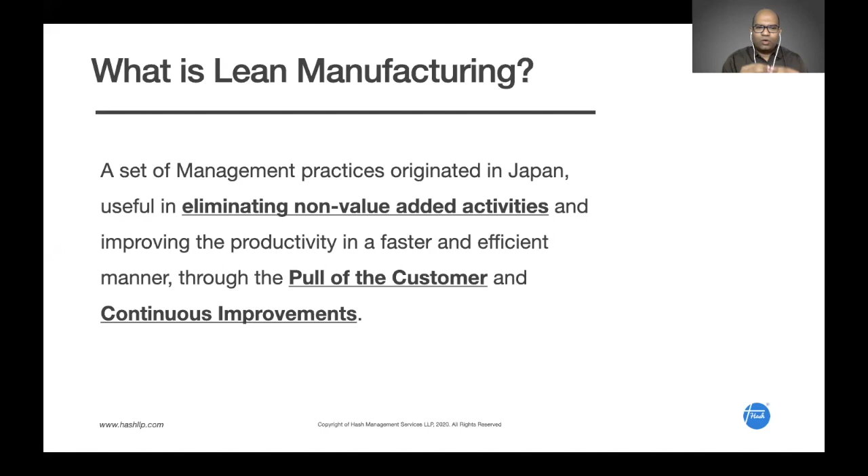The first one is eliminating non-value adding activities. Second one is the pull of the customer, and third one is the continuous improvements. Right. So these 3 are the major foundation of lean, and we are going to look at these non-value added activities in detail today. So let us learn about that. What is this lean manufacturing?

Lean manufacturing is a concept started by Toyota. They started in the early 60s, and they perfected it over the next 20 years. And the Western world tried to adopt the same, and they renamed it as lean manufacturing. So essentially, it's a Toyota production system. People can use Toyota production system and lean in a similar way.

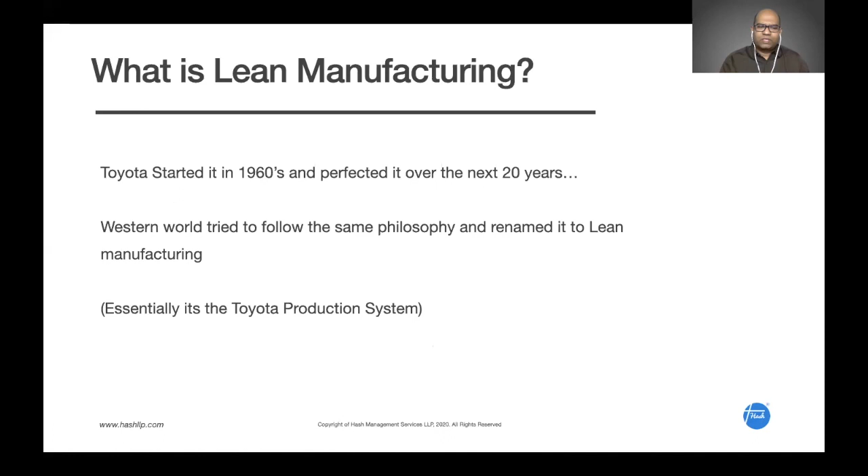Let us look at the history of lean manufacturing. What happened in the 50s and 60s is, after World War II, Japan's economy was in a very bad shape, and the country as a whole wanted to improve.

So the government gave a lot of incentives and took a lot of steps to build the economy, and a lot of companies started manufacturing automobiles, because automobile manufacturing is one of the key industries which will impact a lot of other industries, the ancillary industries, directly and indirectly, right? So it has a big impact on the overall economy.

So a lot of companies started entering automobile manufacturing, like Toyota, Honda, Suzuki, Yamaha, everything. Toyota, if you look at it, earlier they were doing textile machinery business. Even now, a lot of textile machinery will be from Toyota. So when Toyota as a company entered automobile manufacturing, they didn't have the technology. So they wanted to have the technology.

So Toyota's chairman visited America to understand automobile manufacturing, and essentially he visited the big three companies: General Motors, Ford, and Chrysler. And what he observed was American cars at that time, I'm talking about the 50s, were very big cars with large engines. People called them gas guzzlers, and those kind of cars will not suit Japan, because Japan as a country was very poor and they were starting to rebuild the economy. So what he understood was these big cars will not be a great idea for Japan.

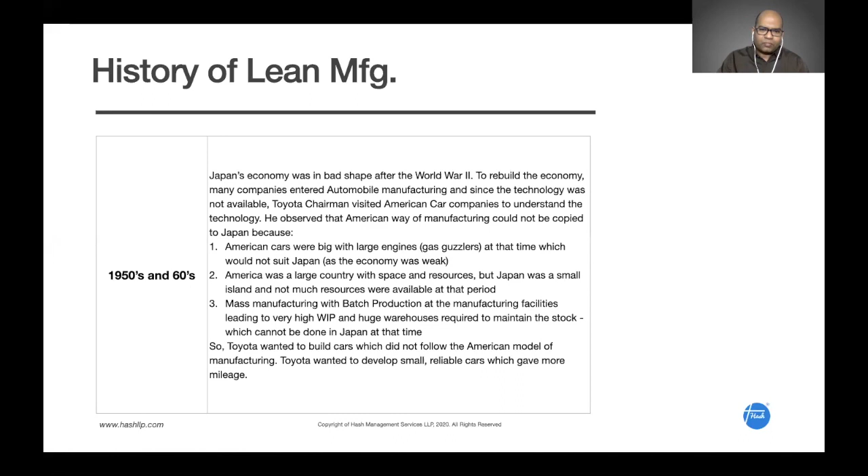So what Toyota started building in the 60s and 70s is small factories which will create multiple versions, multiple car models within the same plant. They tried to reduce the WIP through just in time production. They ran small batches of cars by reducing the changeover time, with faster development cycles, right? At that time, I'm talking about the 60s.

A car in America would have only a 10-year lifetime. Only after 10 years there would be an upgraded version. But Toyota wanted to break this, and they created new versions of the car once in 3 years or 4 years, and they wanted to do the right quality products at the first time. So essentially Toyota made reliable cars which are small cars and which gave a lot of mileage, and a lot of new versions started coming in, right?

So people started liking these Toyota cars, and in the 80s a lot of Americans started buying these cars. Toyota's cars and Japanese products in general became very popular, and the market share of the big three car companies started falling down. So what these car companies, GM, Ford, and Chrysler, did is they sponsored a lot of research, and through the universities, they sent a lot of researchers to Japan to understand how Toyota is manufacturing their cars.

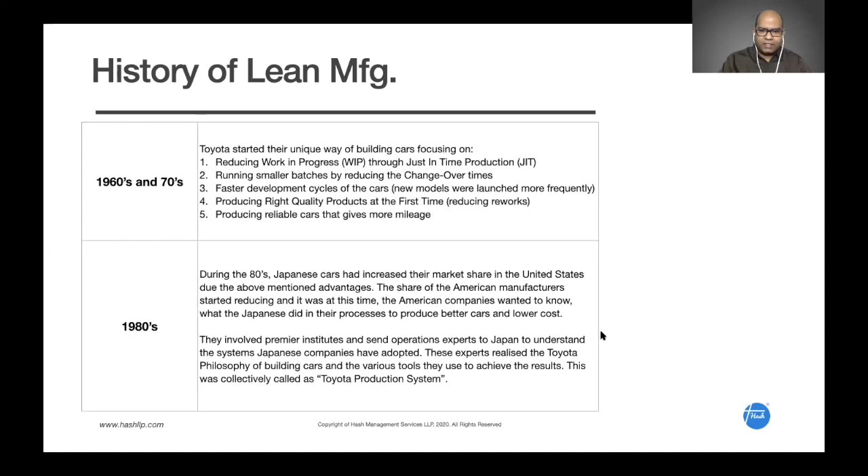Because they thought, okay, these are the people who came to us for learning automobile manufacturing, and now their cars are much better, giving more mileage, fewer breakdowns, right? So how are they doing these cars? So a lot of these researchers came to Japan in the 80s. They started learning these principles, and they went back to the US in the 90s and started taking this learning to the automotive industry.

And when they went to these American car companies, they cannot use the words Toyota production system, right, inside a General Motors plant or a Ford plant. So they wanted a different name, so they created a term called lean manufacturing. So in the 90s lean manufacturing became a big activity inside these US car companies. And after the 90s, in the early 2000s, it started spreading to a lot of other countries also.

In India, a lot of automotive companies like TVS Group, Bajaj, Hero Honda, have started following this lean manufacturing from the 2000s, the last 10 to 20 years. But what essentially we are following is Toyota's production system, renamed as lean manufacturing system. If you look at a lot of other big companies like Siemens, for example, they have their own manufacturing system, Siemens manufacturing system. If you look at Alstom, maybe they will have Alstom manufacturing system.

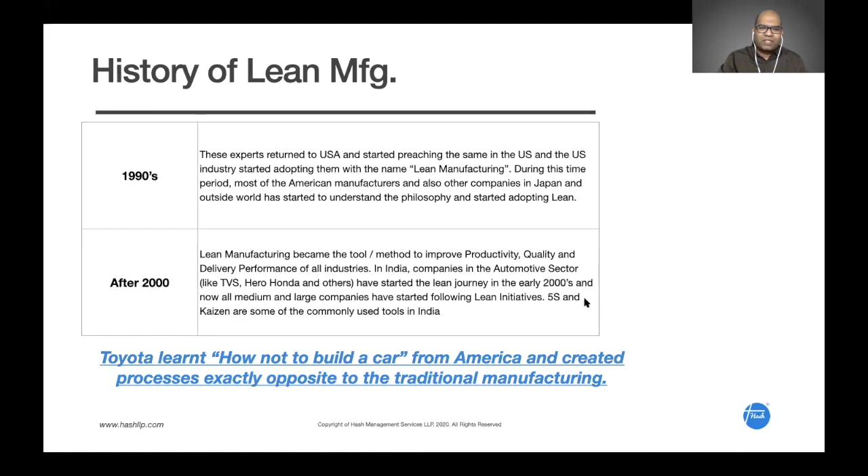But essentially, if you look at all those best practices from Toyota, the Toyota manufacturing system, that will be there. They just repackaged it, and every company started creating their own manufacturing system, which is essentially the Toyota manufacturing, right? So this is the brief history of lean manufacturing.

Is lean applicable to all the industries? Yes, very much. Lean philosophy can be applied to all the industries: automotive, machine shops, castings and forgings, plastic components, fabrication units, medical devices, leather footwear, food processing industries. A lot of companies can use this, and it doesn't matter whether your company is small, medium, or large. Lean can be applied in all sizes of companies.

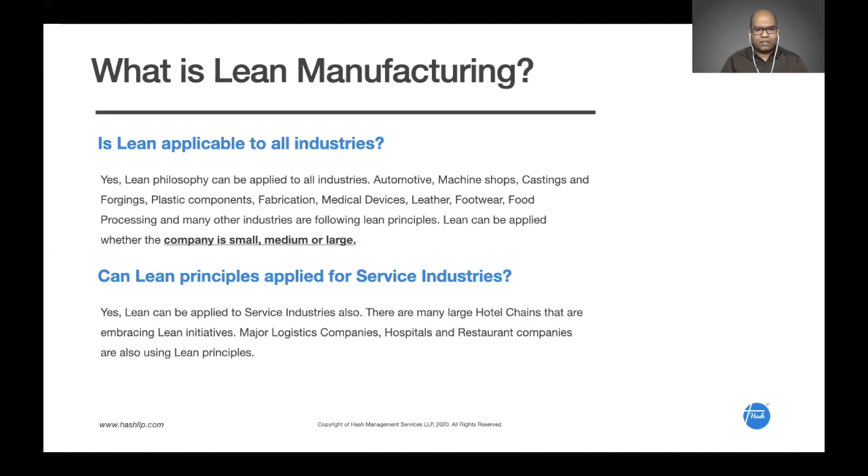Can lean principles be applied for service industries also? Yes, very much. A lot of hospitals and hotels in the Western world have started adopting lean principles. A lot of logistics companies, restaurant companies, people are starting to use lean in the service industries also. Right? So this is a quick history of lean manufacturing.

If you have understood the introduction, can you just type yes in the chat box, please? Is my communication okay? Are we going too fast, too slow? Is this okay or not okay? Can you just say yes? All right. Okay, can understand, right? Okay, good. I can see a lot of yeses here. Okay, thank you very much. Thank you.

All right, so we'll go to the next section. I hope everybody has their notepads and pen, right? We are going to have some exercises. So if you still don't have a notepad and pen, I request you to take your notepad and pen. Right? All right, so we are going to the next section.

So great. So we are going to learn about the work and waste. What's the difference between work and waste? Because this is the most important thing. Lean talks about the elimination of waste, and only if we know what is the waste, we can eliminate them or reduce them, right? So this is the most important realization that is required in Lean implementation. And in our consulting programs also, this is the first foundation we create. Once you identify the waste, it's very easy to eliminate them. So let us look at this work and waste.

Let us consider two persons. One person is an obese person, and another person is a lean and fit person. An obese person has a lot of fat in his body, right? A lean person doesn't have fat, so he has a lot of protein in his body. What are the common problems faced by an obese person? Lack of stamina, health issues, higher BP or cholesterol, high risk of heart problems, or difficulty in walking, running, climbing staircases. So a lot of these common issues are faced by this obese person.

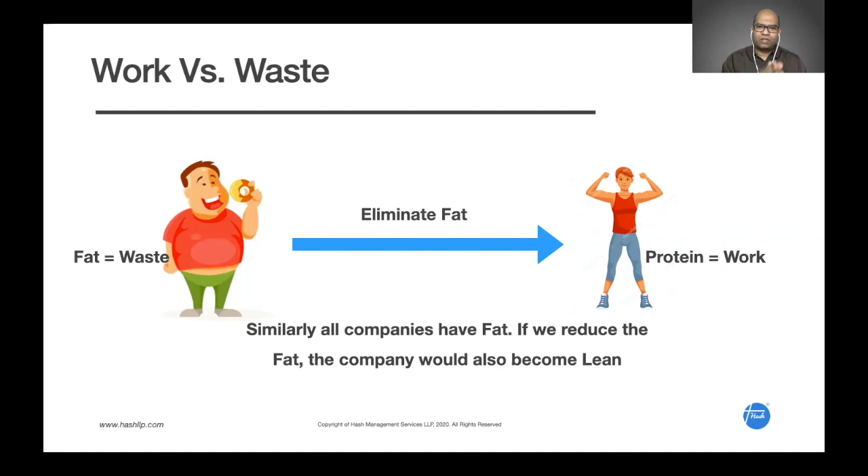We normally see a lot of these results, right? We will not be able to deliver on time. There are a lot of defects or rejections. People are always firefighting. So all these are results of the fats which are present in the company. We normally try to look at the results and try to eliminate the result, but the root cause is the fats which are present in the company. So we need to eliminate or reduce the fat so that the companies or the operations become lean. So that's what we need to understand.

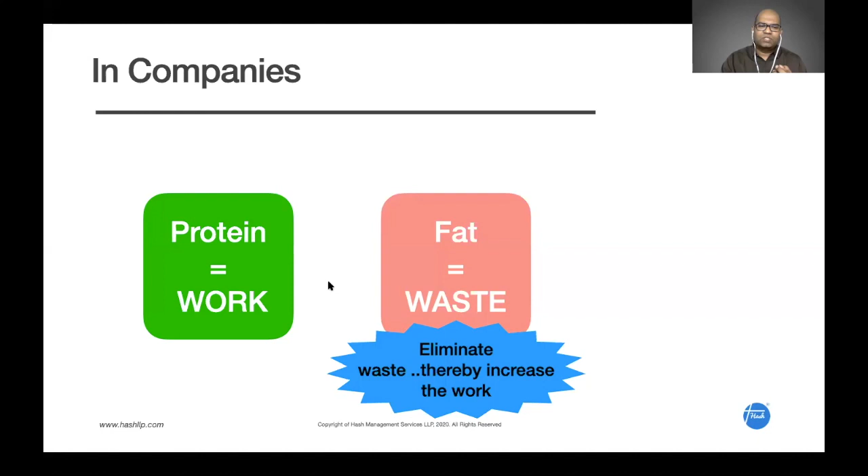So in a company's parlance, protein means work and fat means waste. If we reduce the waste, the company's rate of work will also improve. So this is what we need to learn now.

Let us look at this work. Work means whenever there is a physical or chemical change that happens in the product. That's what we call work. There is a physical or chemical transformation, a change which happens in the product.

The traditional definition of lean talks about what the customers are willing to pay for. Work is what the customers are willing to pay for. That's slightly difficult for a layman to understand. But when we say whether the physical or chemical change that happens in the product, that's called work, it's very easy for people to understand.

When there is a physical or chemical change, it means we are adding some value to the product, so it's called a value adding activity. Imagine sheet metal present in a raw material store, and you are doing a stamping operation. You will not sell the stamped piece at the same price as the raw material because you have added some value. There is some work which happened, a physical change, a deformation, and for this deformation you have added value. So this is called work.

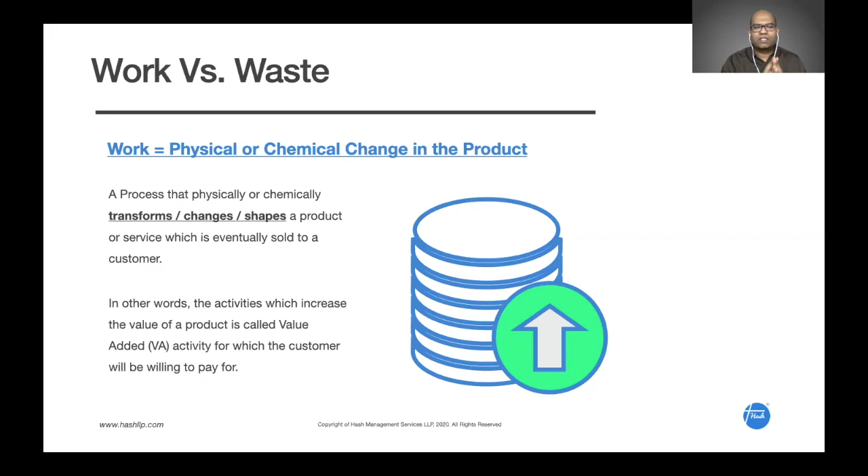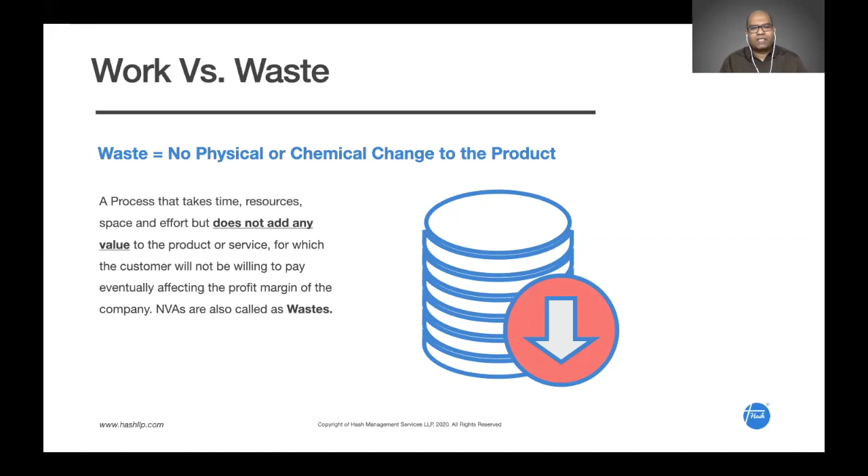So work means value adding activity, which means what is waste? Waste means when there is no physical or chemical change to the product. Any activity, any step, when there is no physical or chemical change, is called a waste, because we are not adding any value. The product is just idle, or there is no transformation happening, so there is no value addition. It's called a non-value adding activity.

If you carefully look at it, more than 95% of the time a product spends inside the factory will be waste. Only less than 5% would be the real value addition time. This is across most factories. Even Toyota, if they observe, their work versus waste will be like 30% work, they still have like 70% waste. That's the number they are now talking about.

So in a regular normal factory, when we look at it in an Indian context, more than 95% of the time would be a non-value adding activity.

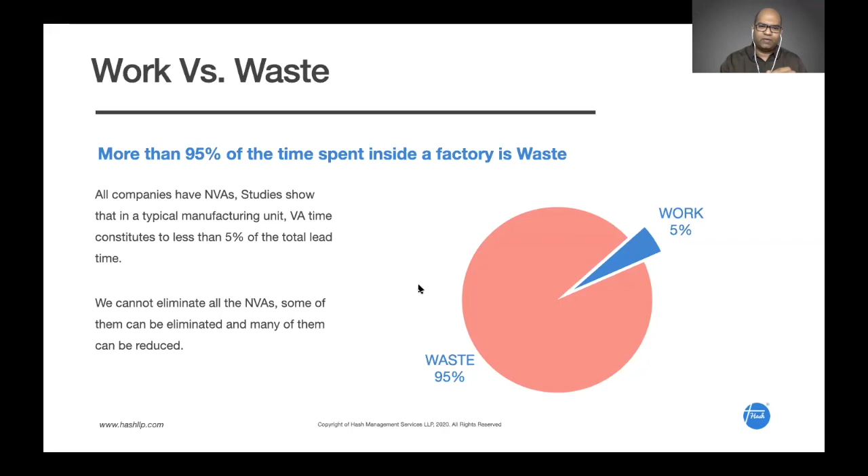Let me give a quick example. Consider a batch production, where the batch size is 1,000 pieces, and we are doing a stamping operation. In this stamping operation, the value added time will generally be 1 second, because that's the time for the punch to come and hit the component. We load the component, the punch and die hit it, and there will be a deformation. So this is normally like 1 second, and after that this first piece will wait for the remaining 999 pieces to get completed, so that this entire bin can go to the next operation.

So this is like 1 second value added time, and the remaining 999 seconds are non-value added for this particular product, because it is waiting for the next operation. There is no physical change which happens during this waiting time. The value added time, the change, happens only for 1 second. This is the way we look at it: work means when there is a physical or chemical change, waste means when there is no physical or chemical change.

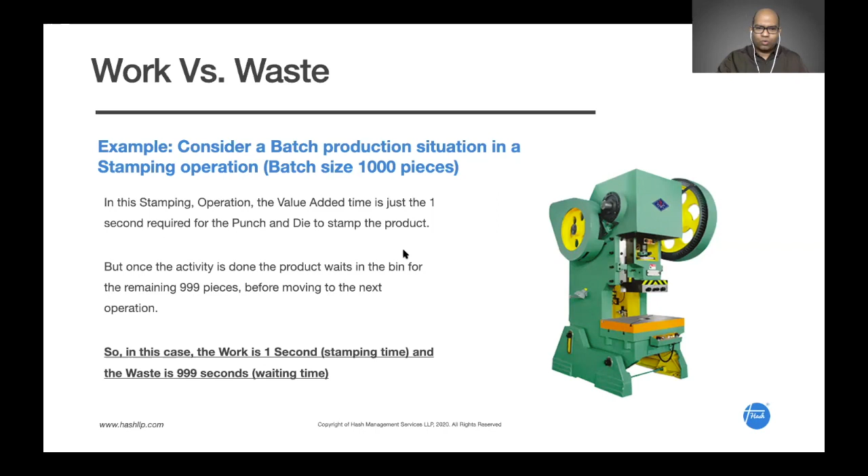We'll also look at a video to understand this more. I'm going to play a video now, where there is a small cutting operation. Take a look at the value adding time.

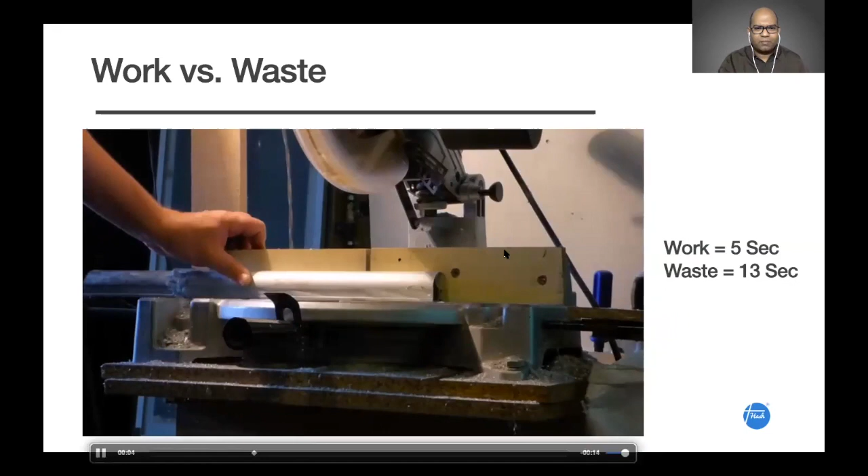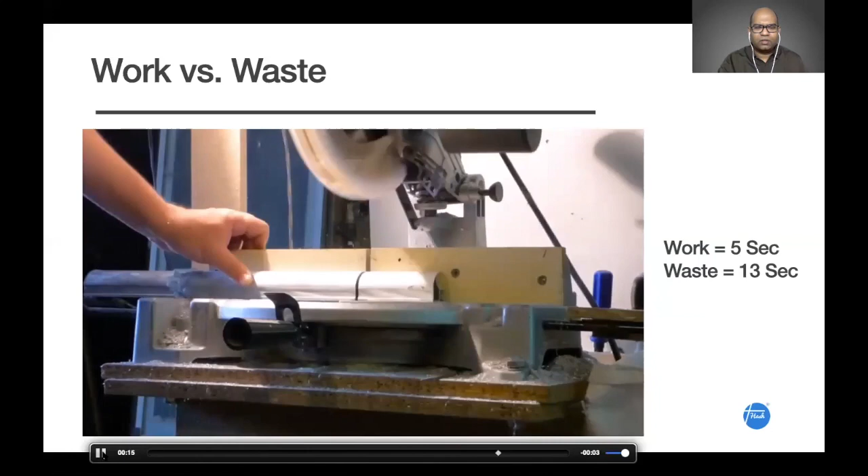So till this time, he has loaded the component and the wheel is traveling. Now it starts cutting, and the cutting activity is over, and the wheel went back to the home position. Now the operator has taken the component and left. There is still the scrap, or chips, which are still lying there - it's a waste, a small piece - and the machine is also idle.

If you look at this video, it is for 18 seconds. The work is for 5 seconds.

That is the time when the wheel touches the component and does the cutting, right? So that time is only for 5 seconds. What is the remaining 13 seconds? The time taken for the component to be loaded, the time taken for the movement of this wheel, all those things during that time. Is there any value addition that happens in the product? No, right? So these are all called waste.

It is not possible to eliminate all the waste, right? We cannot eliminate all the waste, but we can reduce a lot of waste. There are some waste that can be eliminated, some waste that can be reduced.

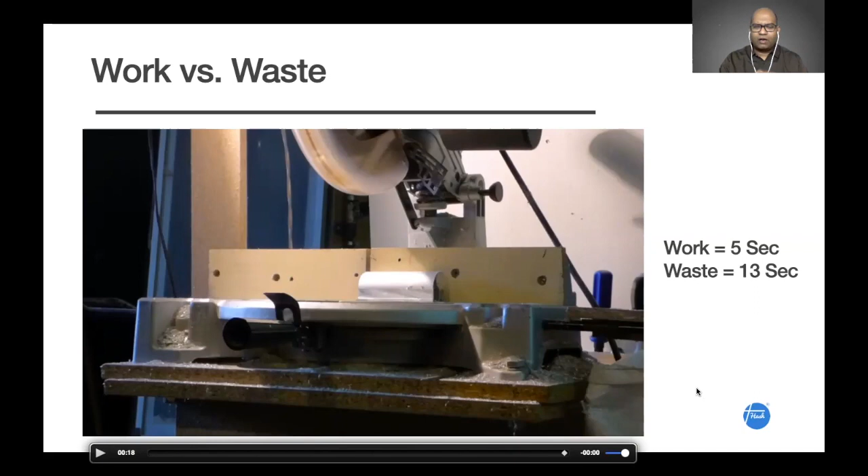We are going to look at this waste in detail in the next section, but I hope all of you are clear about this work and waste, right? So can you understand this work versus waste? Can you just type yes in the chat box if you are clear? Can you type yes in the chat box, please?

Yes, great, amazing. Okay, okay, all right. A lot of people are saying yes, great. So thank you, thank you. A lot of people are saying yes, thank you.

And now we are going to do a quick exercise, right? I want you to take your notepad and pen, list down what are the work in your company, what are the activities which constitute the work, what are the times when you have work in your company. If your operation has 5-6 operations like stamping, turning operation, heat treatment, powder coating, curing - I'm just giving some random operation names - just write down your activity and write down what is the cycle time for that.

It's 1 minute - the time actually taken for the value addition. What is the real value adding time? What is the time the component spends inside the machine or in that process? So what is the activity? What is the cycle time? If you have 10 operations, just quickly note down your 10 operations.

It doesn't matter if you don't know the exact cycle time, doesn't matter. Just note down approximately, like 1 minute or 30 seconds, 40 seconds, like that. Maybe I'm going to give you 1 minute, so you can write it down in your notepad. If you are done, you can say yes, completed, or DONE. I'm going to have a stopwatch timer.

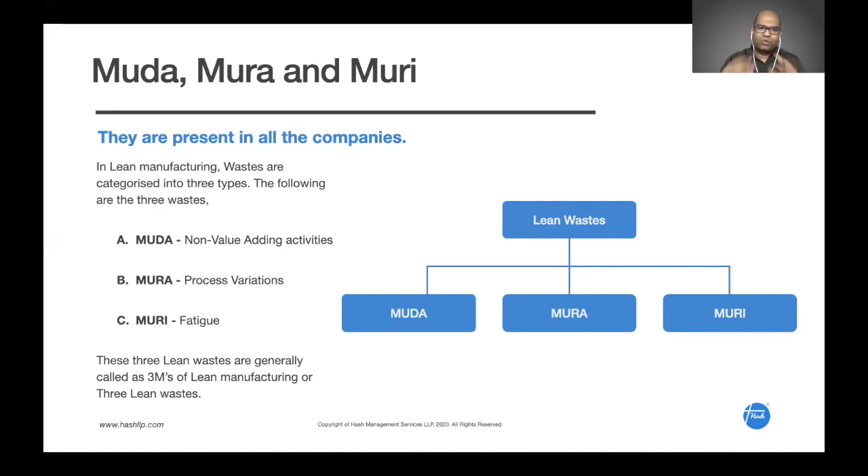Let us look at this waste in detail. There are three categories: muda, mura, and muri. These are all Japanese words. Let us look at these in detail. Muda means non-value adding activities, the activities which don't add any value. Mura means the process variations, and muri means the fatigue or strain caused to people and machines due to overburdening. So let us look at muda, mura, muri in detail.

First, let us look at muda. Muda means the non-value adding activities. In typical lean manufacturing parlance, there are 7 types of waste present in all companies. People have now started an 8th one also, but let us first focus on these 7 types of waste. We can easily remember them as TIMWOOD: transportation, inventory, motion, waiting, overproduction, overprocessing, and defects. These are the 7 types of waste present in all units. Let us look at each one of them.

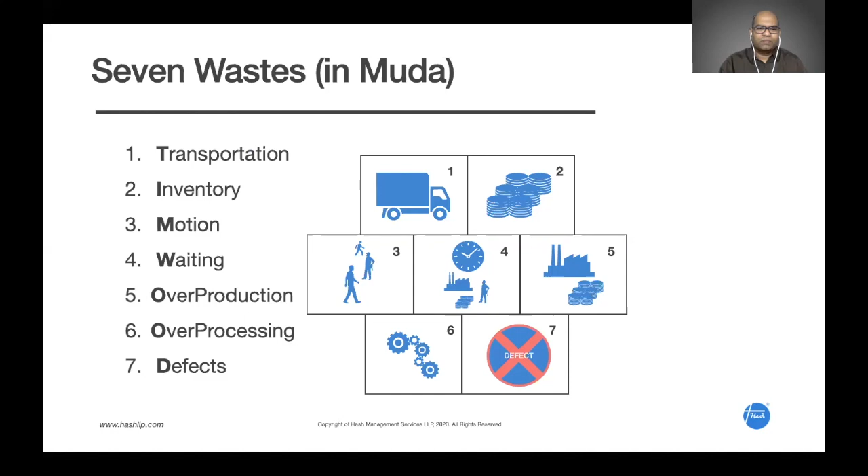Let us first look at the transportation waste. Transportation is moving the component or product from one location to another. Is there any value addition? Is there a physical or chemical change that happens during this transportation? No, right, only the location changes. So we call transportation as a waste. But can transportation be completely eliminated? No, because even if we create a better layout, like a continuous flow system where the machines are close to each other, transportation will still be there. We can reduce the transportation, but we cannot eliminate it.

So how can you identify this transportation waste? Whenever you see a lot of materials lying around in the factory, whenever you see batch production, there will be a lot of transportation. When you see a lot of conveyors, forklifts moving materials here and there, that's a lot of transportation.

So how can we reduce this transportation waste? By having a better layout, by removing this zigzag movement of materials, by having the machines and operations arranged in a product layout, so that the product flows from one machine to another.

If you visit a factory with a slightly older layout, like 10 or 20 years old, they will have something called a process layout, where similar types of machines are grouped in one location. For example, all the drilling machines will be in one location, all the CNC turning machines in one location, maybe the presses in a separate press shop. This means they can operate only in batch production; they don't have a choice because all the machines are grouped like that. So the entire bin has to be moved from one location to another. There is no product flow, there will only be batch production. These kinds of units will have a lot of transportation waste.

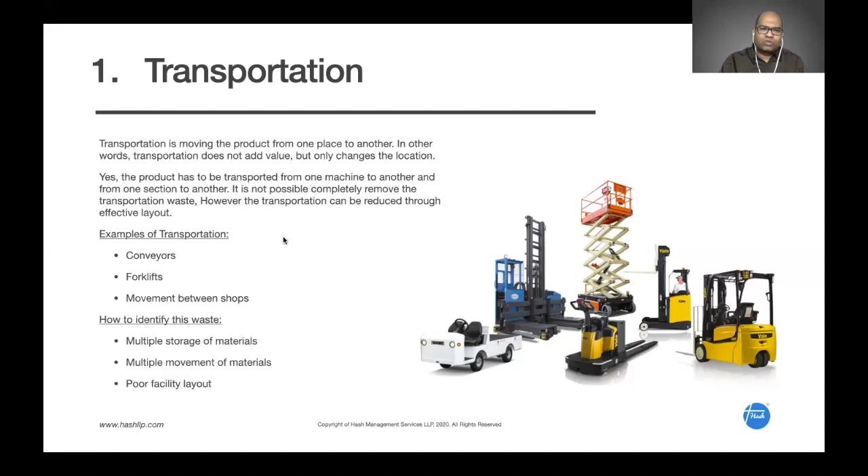Let us go to the next waste, that is inventory. Inventory is the stock present in the company. How can we call that a waste, since there is some value to it? During this inventory, is there any physical or chemical change that happens in the product? No, right. Inventory generally has three major classifications: the first is raw material, the second is work in progress, and the third is finished goods. During the raw material stage, the materials are stored in the raw material stores. Is there any change that happens in the product? No, right.

Similarly, during WIP, when the materials are present in between the machines, is there any change? No. Same thing with FG stock. Is there any change during the FG stock phase? No. So inventory, we consider inventory as a waste. Again, inventory cannot be completely eliminated.

There are companies which have started trying to eliminate inventory. Like if you look at automobile OEMs, I will give an example of Hyundai. Hyundai's plant is present in Chennai, outskirts of Chennai, and they have all their tier one vendors. The tier one vendors are the people who are directly supplying the components to the OEM, and all these tier one vendors, right, they will supply the materials only when it is required for the shift. Right? There is a concept called milk run where the vehicle will go to multiple units, get the materials, and then supply to the factory at the required time.

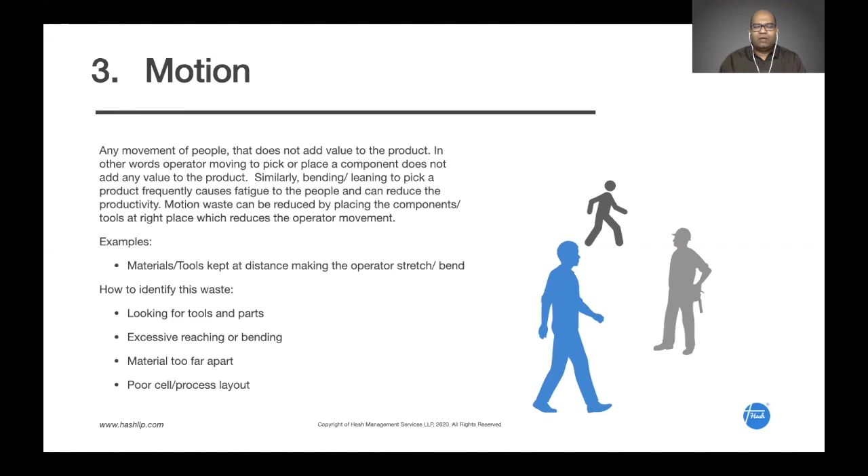And the fourth one is the waiting waste, the idle time in which no value addition takes place. Let us look at three major resources. The first one is the material, second one is the machine, and third one is the manpower. If one of these resources is waiting for any of the other two resources, it's called a waiting waste. So if the machine breaks down, the material will wait for the machine. Similarly, the manpower also will be waiting for the machine. Similarly, during a changeover time, the material will wait for the machine and manpower also will be waiting for the machine. And during absenteeism, you will have machine, you will have material, but manpower is not available. Sometimes machine will be available, manpower will be available, there is no raw material.

So when one resource waits for any of the other resources, it's called a waiting waste. I have seen an example of a person working on a CNC machine, right? This person's job is to load the component, close the door and switch on the process. So the machine starts working. It's a CNC machine, so there is no need for any manual input after that.

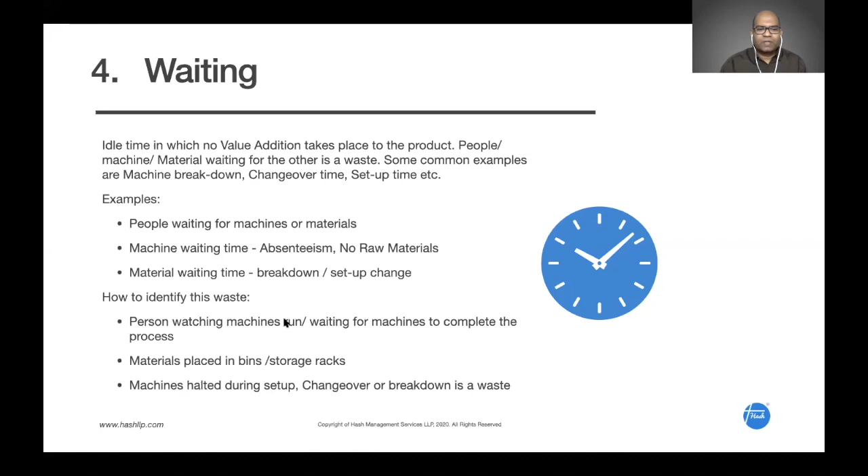But this person, after loading and switching on the machine, will be just watching the machine run, right? So this itself is a waste. This is a waste which I commonly observe in most of these machine shops. So when one resource is waiting for another resource, it's called a waiting waste. And now we are going to look at the fifth waste.

It's called overproduction. Overproduction means producing more than the customer's demand. This overproduction happens on two levels. The first level is on a company-wide level. We're working with a company which manufactures garments. If the customer order is for 1,000 pieces, they will plan for 1,020 pieces, right?

They add these 20 pieces as a cushion, because they may have some rejections in the processes. So they will add these 20 pieces more than the customer's order. So this is a clear overproduction which happens in most of the units. The second level of overproduction is producing more than the internal customer's demand. The internal customer here is the process which is next to my operation, right?

For example, if process A, that is my operation, has a cycle time of 1 minute per piece, and process B takes 2 minutes for one piece, after 1 hour I will produce 60 components, right? But process B will complete only 30 components because the cycle time there is 2 minutes. So these 30 components will be present in between process A and B. They will be the WIP, work in progress.

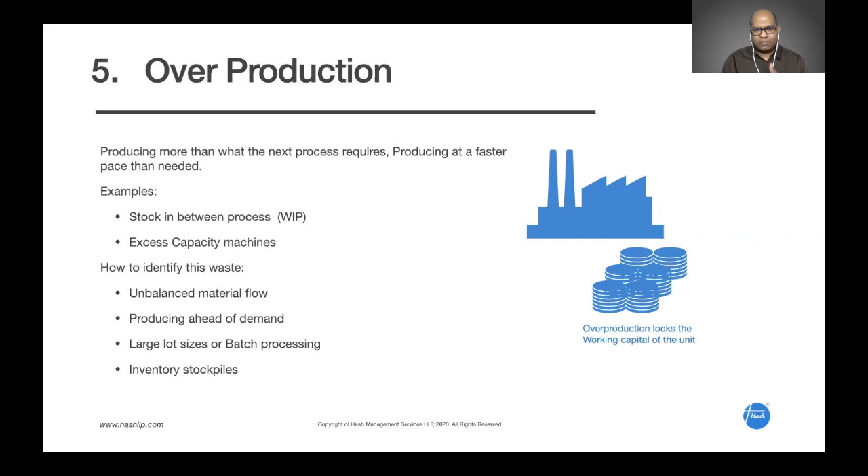And the next waste we are going to look at is over processing. Over processing means the efforts and activities that are added to compensate for some of the inefficiencies in our system. A traditional lean definition talks about processing more than the customer's demand. They gave an example of surface roughness. The customer asks for a particular surface roughness, but we produce a better surface finish. That is one level. But over processing, if you look at it, happens in many stages. I will give you an example.

We work with a large tire company. They have multiple sections. Once the product gets completed in the first section, they have to deliver it to the next section. And when they deliver, they will do an inspection, a counting or weighing activity, they create some documents, and they will pack it. They will wrap it with polythene, and then the material is given to the next section.

And when the next section takes the materials, they again do a counting or weighing activity, and then they do an inspection. They call it an incoming inspection, and then they have to remove the plastic wrapper, again create a document, and then they start producing. So this is what happens in multiple stages. Whenever there are multiple counting, multiple inspection, multiple packing and unpacking of material, we call it over processing.

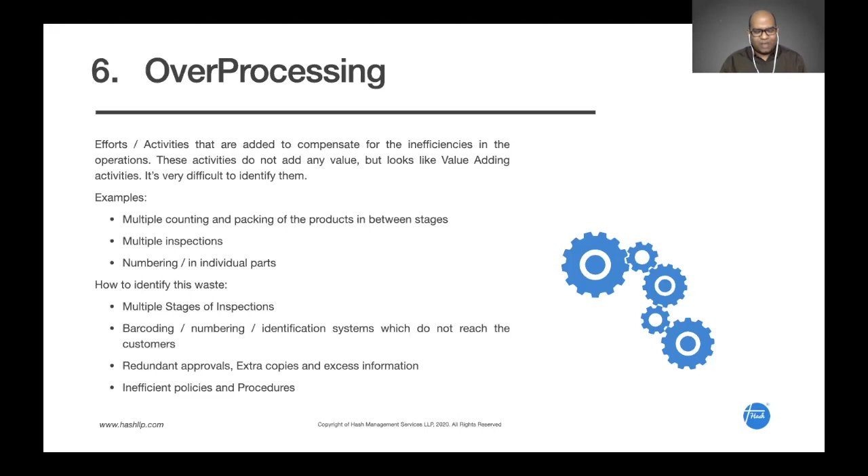Defect. Producing defective components, components which are not meeting the customer specification, that's called defect or defective. There is a difference between defect and defective, right? A defect is the actual issue, the problem with the product. Let us say I will give an example. This is a shirt, right? So I'm wearing a shirt, and this company produces this shirt.

Let us say there is a small mistake: they missed one button on my sleeve. So there is a button which is missed. So this is called a defect. The button missing becomes a defect. Similarly, they may do a wrong stitching. That is another defect. Because of these defects, this shirt became a defective shirt, right?

So defective means the product which you are producing. The defect means the real issue, the problem with the product. So the defect here is the button missing, the improper stitching. And because of these defects, the shirt becomes defective. So there may be one defect or more than one defect in a defective product. But it takes a lot of time and effort to rework. Sometimes you can rework, sometimes you cannot, so the component will end up as scrap.

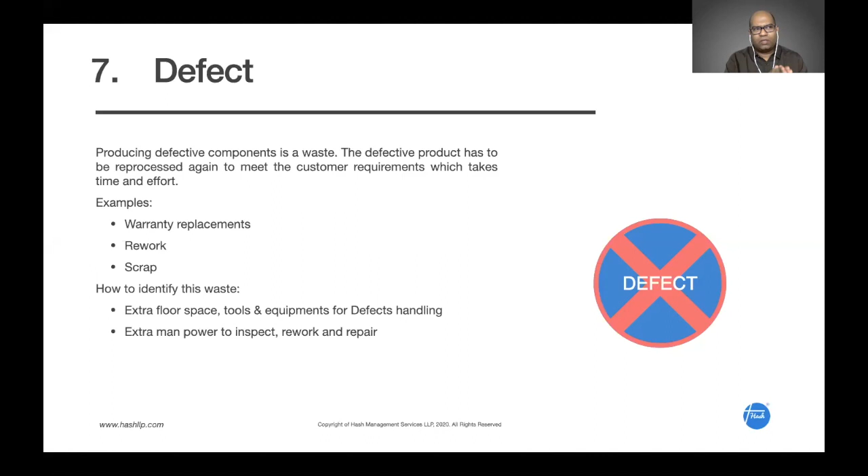So defect is the seventh waste in any company. And these are the 7 wastes which are present in most companies. So far we have covered muda, the non-value adding activities. And now we are going to look at mura. Mura means the process variations in the operations. Again, it happens at 2 levels.

There are some companies where you may be experiencing this. In the first week of the month, the production will be very low. They will be producing at like 50% of their capacity, and in the last 10 days, they will do overtime, Sunday work, all those things, and their volumes will be very high. So there is a clear case of mismatch in terms of the execution of production, the planning, everything. So this is one level of process variation, the company-wide variation.

And the second one is, in a process also there are a lot of variations. Let me give an example. In a CNC machine, the first 10 components which you take out from the machine versus another small sample after like 200 or 500 cycles, there will be a specification change because the tool would have started its wear and tear. We need to do insert changing. So every time there is a change, it creates some process variation.

Similarly, in an assembly operation, for example, the person working on the first shift is doing a tightening of a screw. And the torque given by this person versus the second shift, where let us say a woman employee is working in that particular operation, the torque given by her may be different. It's a clear case of process variation.

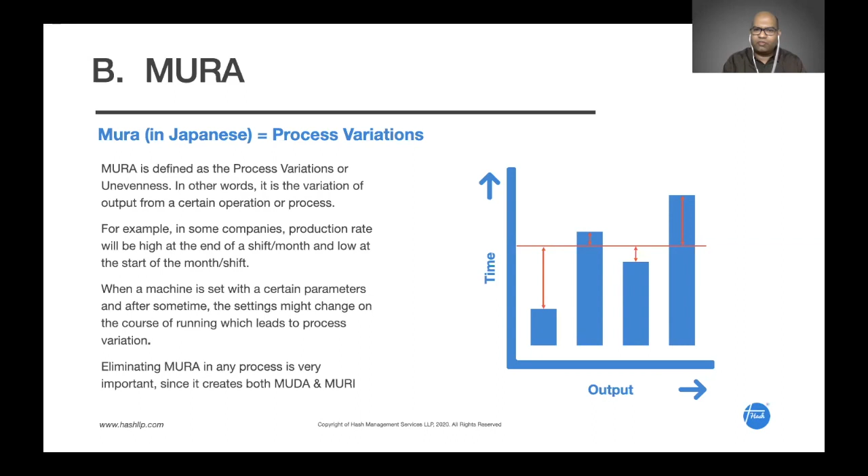Sometimes the same person, during the first hour of the shift, will give a different torque, and maybe in the last hour of the shift he will already be tired, and the torque given may be different. So there is process variation happening in most of these operations, and these process variations will give rise to a lot of muda also.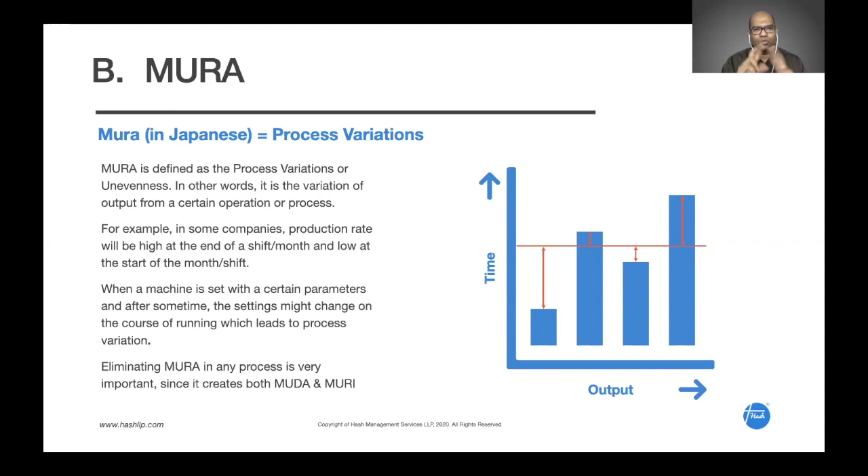Many times, if you look at it, the defects will come from this process variation, right? It may cause some small stoppages in the machine, like a small breakdown, which means it will again add some waiting, overproduction, right? So Mura is responsible for some of this Muda also. So the process variation again happens in two levels, one a company-wide level and also the operation level.

And then we are going to look at this Muri. Muri means the fatigue or the strain caused to people and machines. What happens when we overload these people? Right? When people need to lift a lot of weight and they have to transport it. Sometimes I have seen people taking a lot of weights and climbing stairs. They will be loading it in their warehouses. What's going to happen is they will get tired faster, and there will be a possibility of a lot of accidents.

Second one, if you look at overburdening of machines, what will happen when we overload the machine? The machine will start vibrating. They will start creating some noises. After some days it starts leaking oil, coolant, all those things, and after some time it breaks down. There will be a lot of breakdown of machines also. So Muri means the fatigue or strain caused to people and machines. So because of that also we are losing the productivity.

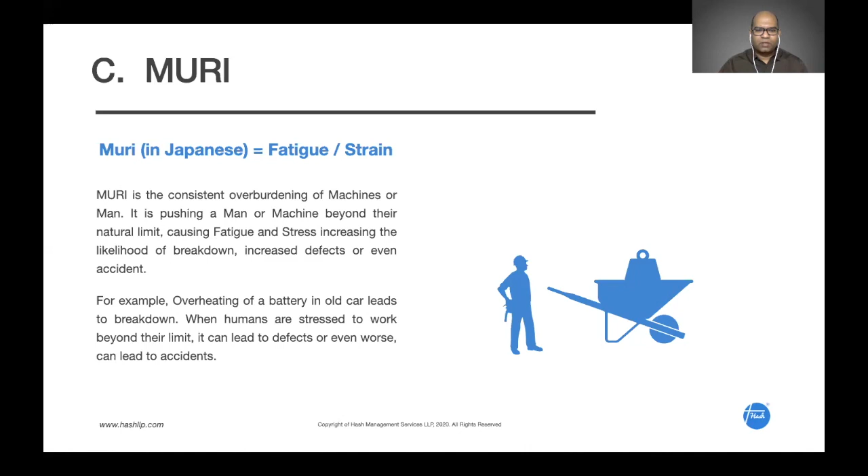So these are all the three types or categories of waste. Muda, we looked at the 7 wastes, Mura and Muri. So are we clear on this? Muda, Mura, Muri? Can you just say yes in the chat box, please, if you are clear? All right. Good. A lot of people are there saying yes, yes. Thank you very much.

So now we are going to go for a poll. I'm going to launch a poll now. It will be there in your computer screens or in your mobile screen also, right? All you need to do is select your answers and submit. It should be in your computer screens now. A green color box is there. Just select your answers and submit. There are three questions.

When there is a physical or chemical change in the product, it's called dash. Excess inventory is a waste, dash. When a machine is in breakdown, what waste will get created, dash. So people have started answering. A green color box is there in your chat box. So far 20 people have answered. Thank you, Mr. Vinay. Thank you, Mr. Sridhar. I'm going to end the poll in another 15 seconds, maybe.

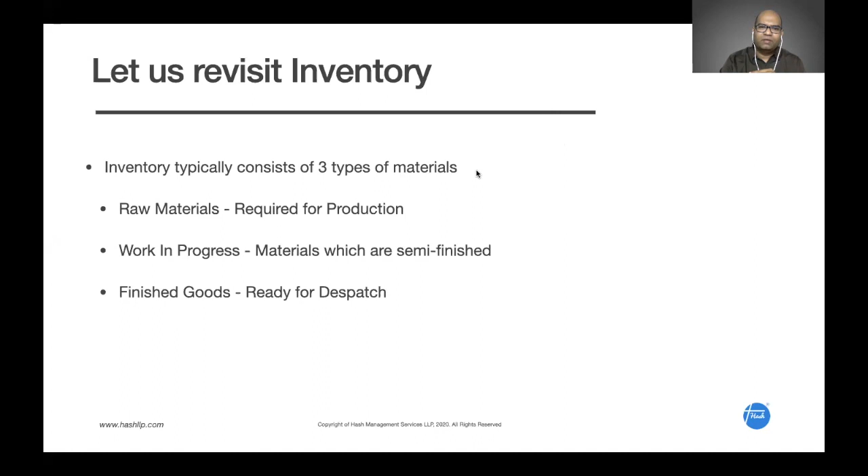And let us look at this inventory again, right? I said earlier that we are going to look at this inventory again. Inventory typically has 3 major components: the raw materials, then WIP, and the FG, right? FG is materials which are ready for dispatch. So let us look at this RM and FG. In most of the cases, the industry determines the stock position. I will explain this in detail.

For raw material, for example, we have worked with a couple of mango pulping industries in Dharmapuri and Krishnagiri areas. For these mango pulping industries, the mango, the raw material, is available only for like 3-4 months in a year, right? So what these companies do is during the season they will buy mangoes in bulk and stock it, so that they can run the plant for 3-4 months, and with the existing raw material stock they can run the plant for another 3-4 months.

So overall in a year they will run the plant for like 7 or 8 months maximum. After that there will be a shutdown of the unit, and then they wait for the next season. So in this case they don't have any other option but to buy these mangoes and stock it. They don't have a choice because the raw material is available only for a particular season, right?

Similarly, if you look at finished goods stock in some industries like air conditioning units, the peak season of sales is the summer season. March, April, May will be their peak season in terms of sales. But to meet this sale, the company will not be able to produce in the peak season. What they do is they produce like 2-3 months ahead of the peak season, and they stock their entire warehouses and their downstream channels. I'm talking about the wholesalers, retailers, stockists, super stockists, the entire sales pipeline. They will fill it with the finished goods.

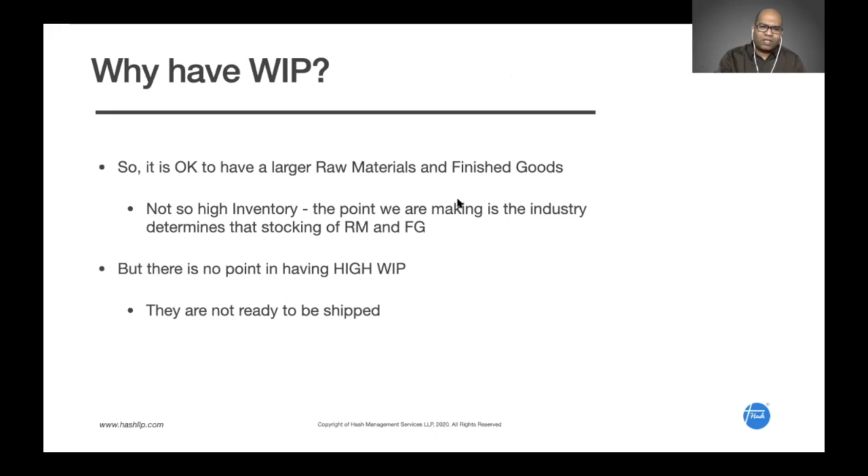But let us look at this WIP. Why do we need to have a lot of WIP? What are the issues with WIP? Because WIP are the materials which are not going to be sold immediately, but we have done some value addition, right? But it's not complete yet, and so it is work in progress. What are the common issues with having a lot of WIP?

WIP takes a lot of space, right? I have seen companies where there is not much space available. Everywhere we see a lot of WIP. In between the machines, wherever they find some space, they will have WIP, right? So WIP takes a lot of space, and it's very difficult to account for. How will you confirm or arrive at a price for a WIP material? Right?

The costing department will say some number, the finance department will say some other number, the production team will say some other number. So it's very difficult to arrive at a particular value for the WIP. It's very easy for raw material and FG, because raw material stock, you know the price at what price you bought it, and FG price, what price you're going to sell it. But it's very difficult to arrive at a price for the WIP.

Third one is defects or quality issues. Most of the times, a lot of these defects or quality issues will be hidden in WIP. If I am the operator of a machine and I am doing some activity, and if I get a lot of defects, what I would do, if I have a lot of WIP nearby, I will just exchange it. I put the defective component inside and take a fresh component outside. I don't want to reveal that a lot of defects are arising in my operation. And after like 1 or 2 months, if they open that particular bin and say a lot are defective, I can easily say I didn't do it, I don't know who did it.

So a lot of difficulties in managing these defects or quality issues will happen, and excess manpower is required to monitor the WIP. I have seen in a couple of factories where they have 2 or 3 people whose daily job is to walk through the factory floor and update the WIP status, and they will send a report to senior management. They're called inventory controllers. This is what happens because there is a lot of WIP. We need extra manpower to monitor them, and there is always a risk of product obsolescence.

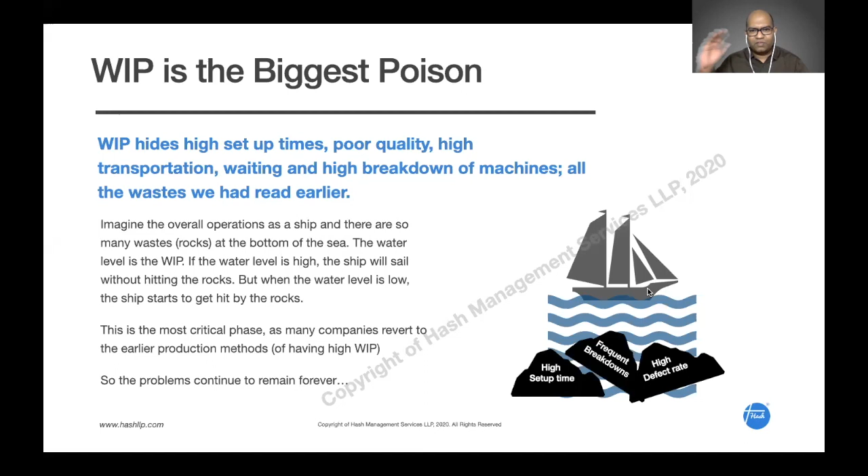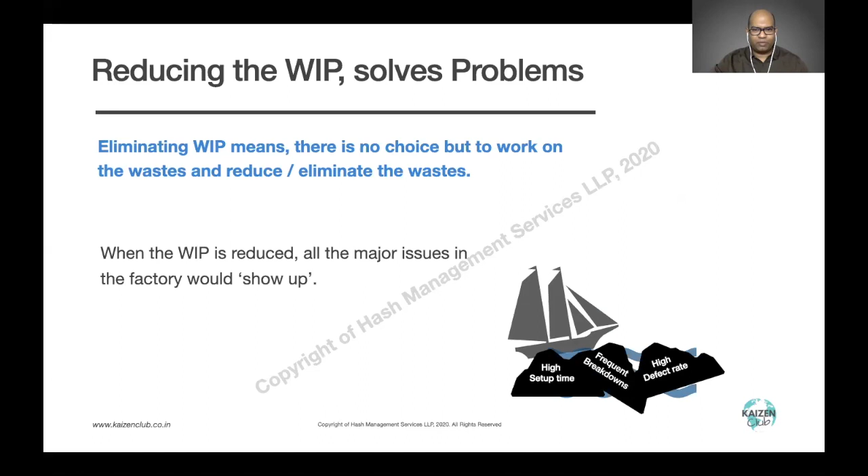So what I'm trying to communicate is WIP hides all your issues, and if you try to reduce the WIP, all your problems will come up, and again there will be pressure or panic on the shop floor, and you go back to the previous stage of having higher WIP. So there is one magic tool, right? This is what we learned. So there will be pressure to go back, and what will happen?

There are a lot of companies where they have implemented lean tools like SMED, TPM, TQM initiatives for the year. After some time, like 1 week or 1 month, all these initiatives will fail. There will not be any sustenance because if there is a lot of WIP, why should I go and reduce the changeover time? There is no pressure for me to do it, right? Because I have a lot of WIP, why should I reduce changeover to less than 1 minute or 10 minutes? I don't have to.

Because I have WIP, which will make sure that the downstream operation will not suffer, till the time I have WIP, any lean activity will not be successful. It will fail only because people don't have the pressure to continue or sustain it. Only if all the WIP is reduced will the lean activities get sustained.

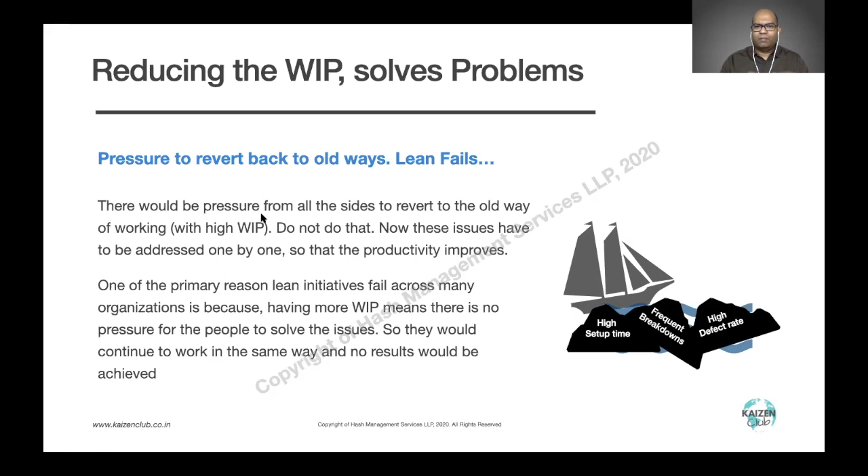So the first thing, the magic pill to solve this problem, the magic pill which will solve this WIP issue, is called a continuous flow system.

If you have a continuous flow system, a single piece flow where the product moves from one operation to another in sequence without any waiting, immediately taken to the next operation, then all the waste will come out. There is no transportation, only going to the next operation, so transportation waste is reduced. No need for WIP because material immediately goes to the next operation. No need for waiting. Over processing will not be there. Overproduction will not be there. Defects can be immediately found and corrected. So a continuous flow system will eliminate the WIP and bring out all these inefficiencies.

If there is a high changeover time, let's say we have 5 operations and machine 3 has a 3-hour setup time, what will happen for those 3 hours? The entire line will wait. So at this time we will go and reduce the changeover time of machine 3. So the first thing is we establish a continuous flow system, then all the inefficiencies will come up.

And then we have to use specific tools to address those inefficiencies. Only then can we reduce these inefficiencies. We should not go back to the previous stage of having high WIP. So if you look carefully, all these lean tools are built for a particular purpose.

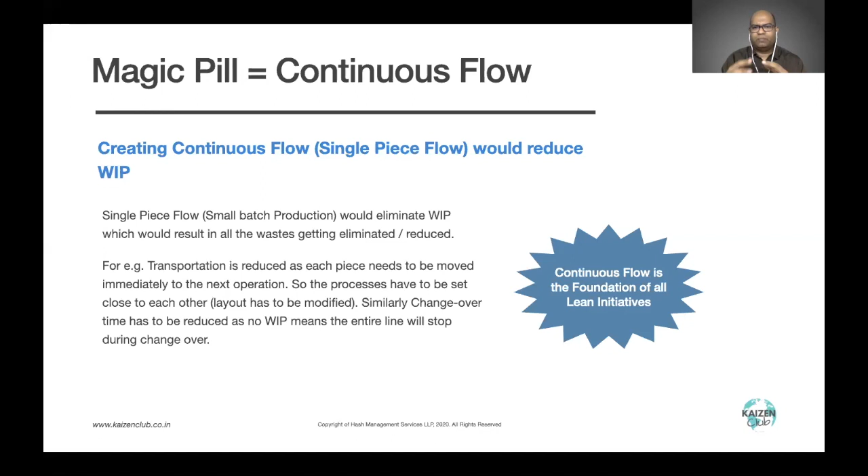So all the other lean tools will work together. Continuous flow system is the foundation on which you create the other lean tools. Without that continuous flow, no other lean tools will work. So this is what we wanted to cover in this webinar.

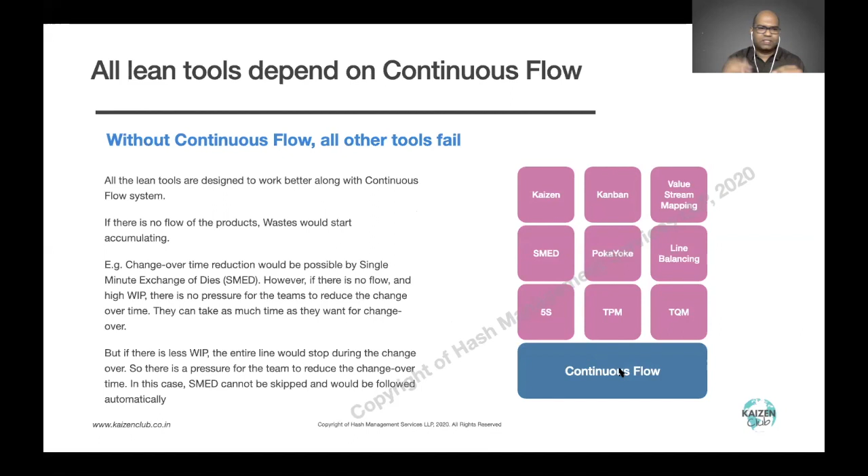So we have learned now about continuous flow system and also the biggest poison, that is the WIP. So continuous flow system is the foundation of all the lean activities. So have you understood the impact of WIP? Can you just type yes in the chat box, please?

We are almost coming to the end of the webinar. Yes, yes, yes. Was it useful? Yes, yes, yes. Okay, I can see a lot of people saying yes. Great, amazing. Thank you.

Mr. Abhishek asked something - how to manage if continuous flow is not possible. Yes, there are some cases where we cannot have a continuous flow system. Heat treatment, exactly. So we need to have some supermarkets, and we have to have supermarkets and Kanban. That we can discuss slightly at the next level, Mr. Abhishek - we can discuss it offline.

Yes, there are some cases where continuous flow is not possible because the machines may not be designed for a continuous flow system. It's a batch processing machine, like heat treatment, powder coating, or curing. Some activities will have high cycle time, some will have very low cycle time. So we need to have - there are some techniques available, like supermarkets and all that. It's slightly advanced level. We can discuss it maybe in the next session also. Thank you.

So what we are now going to do is have an exercise. I request you to go back to your notepad and list down: does your company have a lot of WIP? List down the operations which are creating this WIP. Where exactly is this WIP getting created? Why - because the setup time is high, because there are a lot of breakdowns? Just write it down, what are the operations creating this WIP. Can you write it down for the next 1 minute, please? We can discuss that.